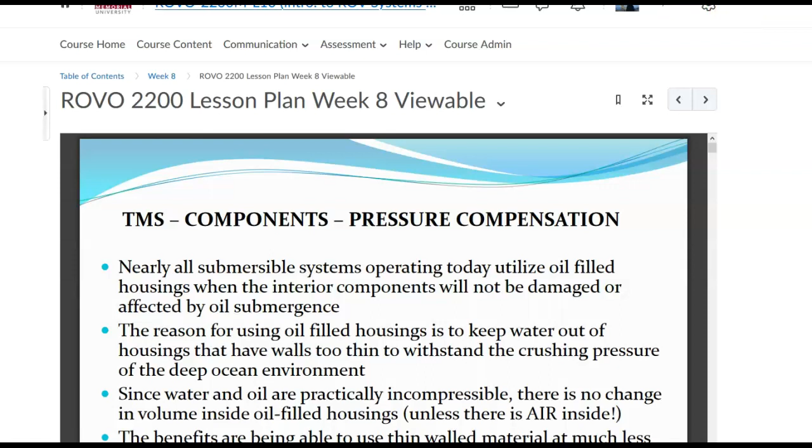Alright, here we're starting week 8, and this is about the hydraulics. Pressure compensation components of the TMS. So we're still into the TMS, the tether management system. That's the submarine base for the ROV.

Just a recap. Okay, I got a squeaky chair, which we don't like. Okay, so...

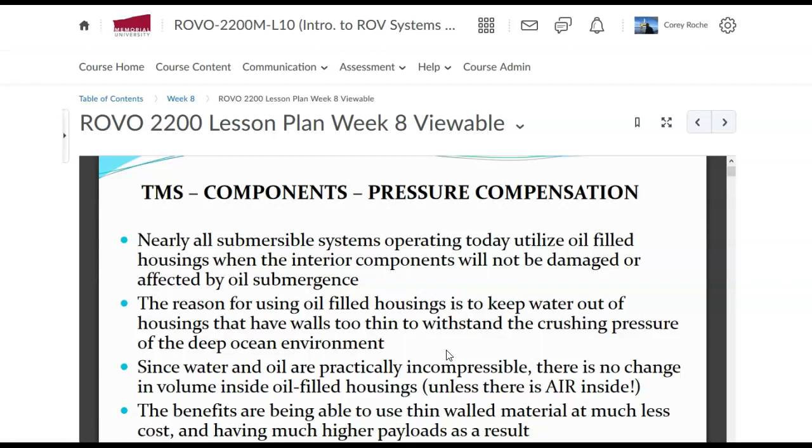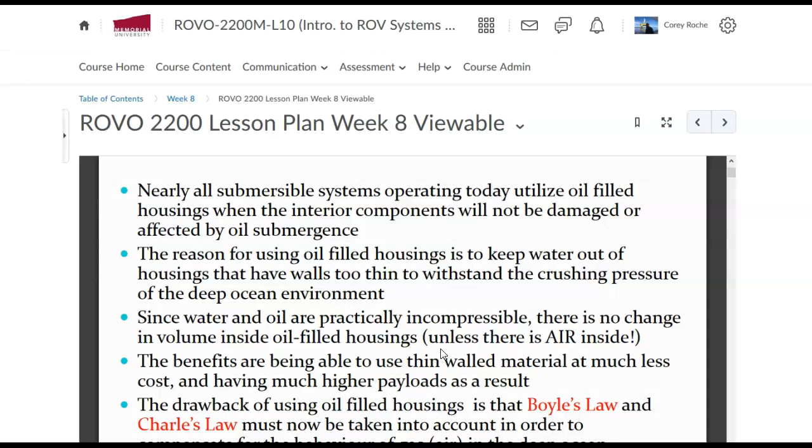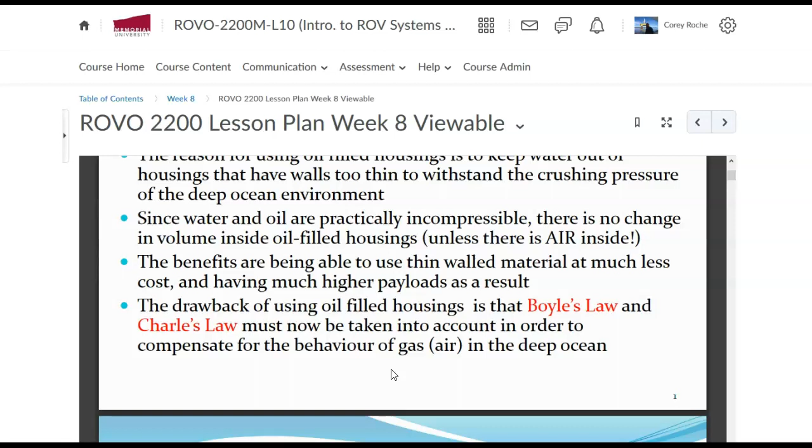Since water and oil are practically incompressible, there is no change in volume inside oil-filled housings unless there's air inside. Hence the air and water checks, okay? The importance of them. The benefits are being able to use thin wall materials at much less cost and having much higher payloads as a result. So that's self-explanatory. The lighter the ROV is, with these thin walled housings, the more payload it can carry, okay? The drawback of using oil-filled housings is that Boyle's law and Charles' law must now be taken into account in order to compensate for the behavior of gas, which is air, in the deep ocean.

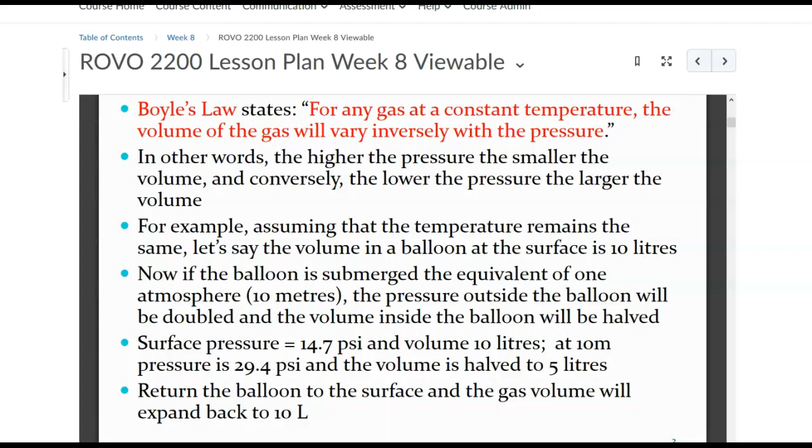Boyle's law states for any gas at a constant temperature, the volume of the gas will vary inversely with the pressure. In other words, the higher the pressure, the smaller the volume, and conversely, the lower the pressure, the larger the volume.

For example, assume that the temperature remains the same. Let's say the volume in the balloon at the surface is 10 liters. Now, if the balloon is submerged the equivalent of 1 atmosphere, 33 feet, 10 meters, the pressure outside the balloon will be doubled and the volume inside the balloon will be halved. Surface pressure equals 14.7 psi and volume 10 liters. At 10 meters, pressure is 29.4 psi and the volume is halved to 5 liters.

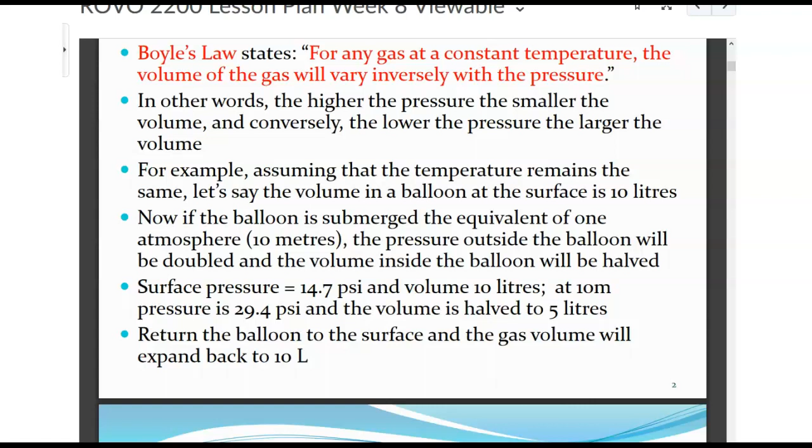Alright, so do you get that? 14.7 psi and volume is 10. 10 meters down, it doubles and the volume is halved to 5 liters. Return the balloon to the surface and the gas volume will expand back to 10 liters.

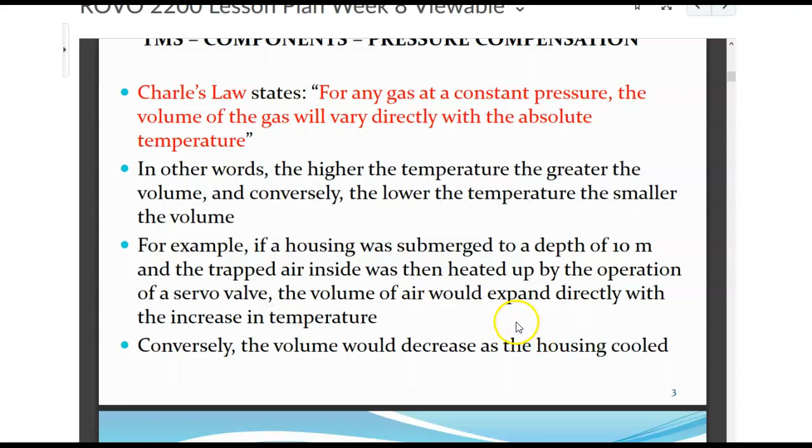Charles' law states for any gas at a constant pressure, the volume of the gas will vary directly with absolute temperature. In other words, the higher the temperature, the greater the volume, and conversely, the lower the temperature, the smaller the volume. For example, if a housing was submerged to a depth of 10 meters and the trapped air inside was then heated up by the operation of a servo valve, the volume of air would expand directly with the increase in temperature. Conversely, the volume would decrease as the housing cooled.

So now we have the TMS and ROV, oil-filled housing and hoses being submerged in the deep ocean. Two methods are used to compensate for the external pressure acting on these housings and hoses. Oil-filled pressure balanced: this method is used for subsea cabling when the cables are filled with oil but not pressurized, meaning the oil inside is pressure balanced with the ambient pressure outside.

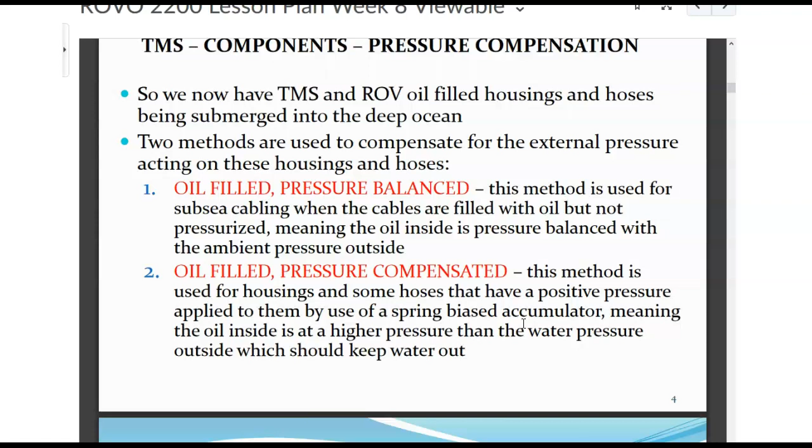Oil-filled pressure balanced, pressure compensated again. This method is used for housing and some hoses that have a positive pressure applied to them by use of a spring-biased accumulator, meaning the oil inside is at a higher pressure than the water pressure outside, which should keep water out. So know those two and know the difference.

So here we've got a compensator. Some people would know it as an accumulator probably, those with a hydraulic background. And that being said, if you have a hydraulic background, you are light years ahead of people, alright? So hydraulics is good to know.

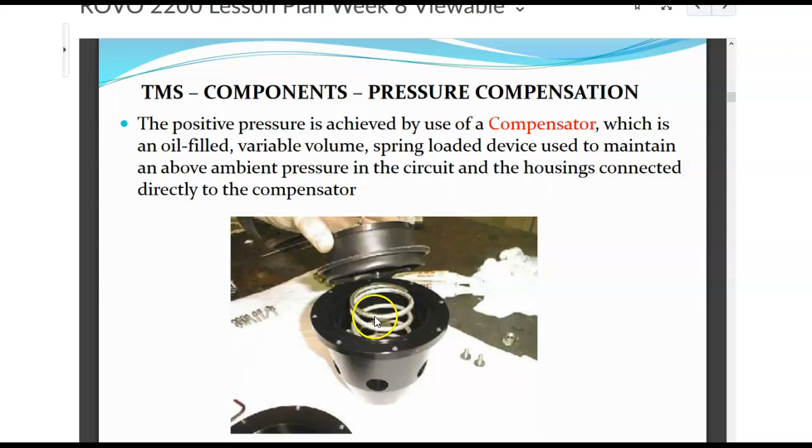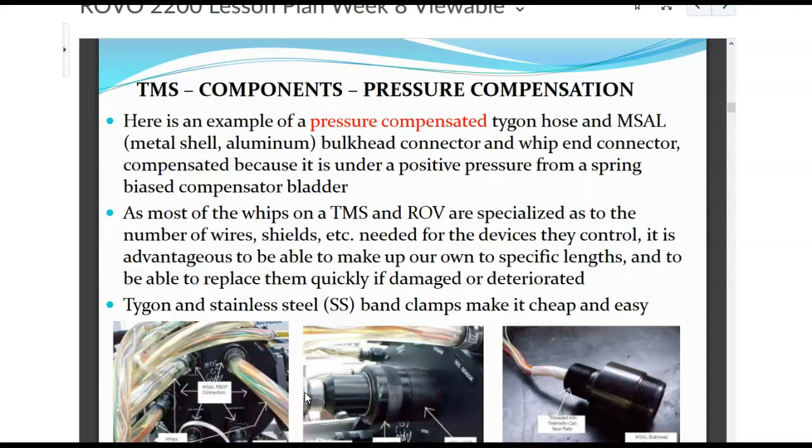The positive pressure is achieved by use of a compensator, which is an oil-filled variable volume spring-loaded device used to maintain an above ambient pressure in the circuit and the housings connected directly to the compensator. Here's an example of pressure compensated Tygon hose and MSAL, metal shell aluminum, bulkhead connector, and whip end connector, compensated because it is under positive pressure from a spring biased compensator bladder.

As most of the whips on a TMS and ROV are specialized for the number of wires, shields, etc. needed for the devices they control, it is advantageous to be able to make up our own to specific lengths and to replace them quickly if damaged or deteriorated.

I already talked about the importance of, and how cheap yet effective these Tygon hoses are, putting in your own wires, to get them through like 6 to 10 foot lengths. Say you got like 6 to 8 wires, or even 10. The best way to do it...

...is to fish them through, to sort of twist them, braid it. So to braid it, you would put one end in a drill and the other end in a vise. And you would do what I call the Jesse James method.

Jesse James is this guy that was into motorcycles, making his own motorcycles years ago. Not the outlaw Jesse James, okay, from the 1800s.

You do a controlled speed and twist your cabling. Now, knowing that if you take off the drill and or let go of the vise, it's all going to come unraveled, right? So you'd have to sort of tie wrap it into place. But now you got a nice braid made.

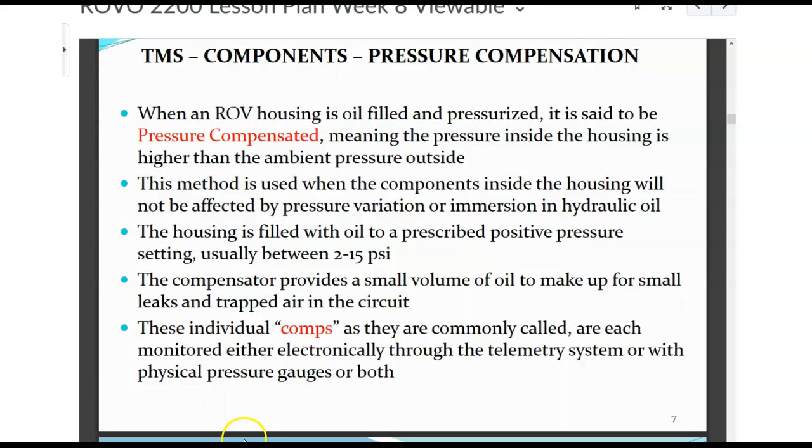The compensator provides a small volume of oil to make up for small leaks and trapped air in the circuit. These individual comps, as they are commonly called, are each monitored either electronically through the telemetry system or with physical pressure gauges, or both.

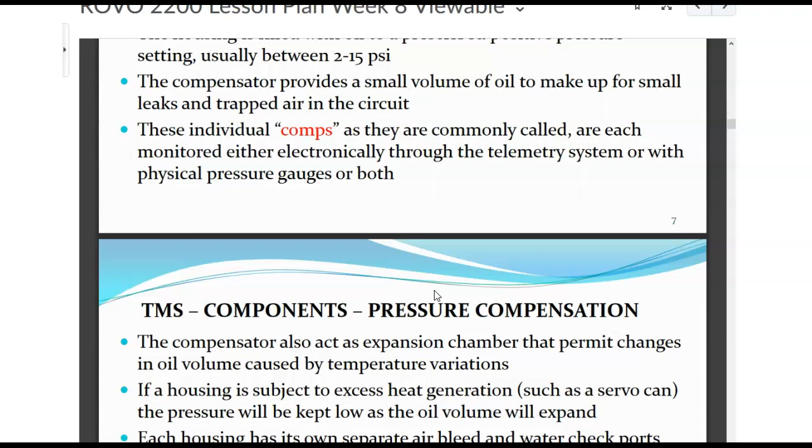The compensator also acts as an expansion chamber that permits changes in oil volume caused by temperature variations. If a housing is subject to excess heat generation, such as a servo can, the pressure will be kept low as the oil volume expands.

Each housing has its own separate air bleed and water check ports. The air bleed ports are located at the top, as air bubbles will migrate to the highest part of the housing, and the water check ports are located at the bottom, as water is heavier than oil and will sink to the bottom.

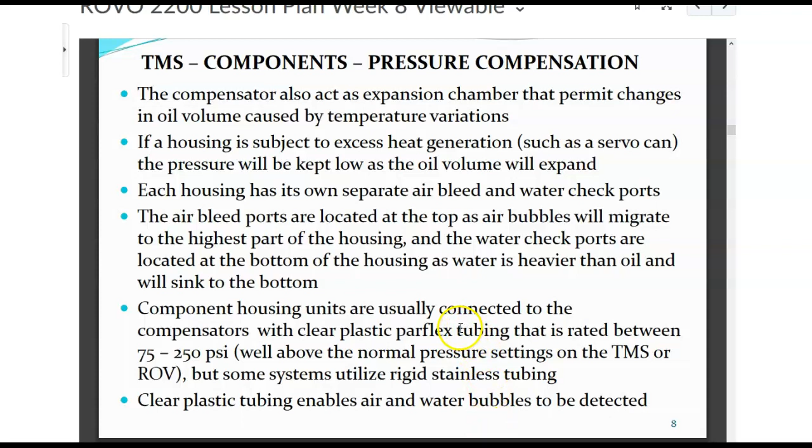Component housing units are usually connected to the compensator with clear plastic Parflex tubing rated between 75 to 250 psi, well above the normal pressure settings on a TMS or ROV, but some systems utilize rigid stainless steel tubing. Clear plastic tubing enables air and water bubbles to be detected, so you can see it. Very effective designs.

So here you got 3 Firestone bladders, okay, the respective combination of Parflex and stainless steel tubing.

Alright, so you can see all the tubing, right? You got your pump, your motor, Tygon, filled with oil. Air checks up on top, and down below there's a ball valve for isolation, another ball valve for isolating. But somewhere there should be a water check there. Not very clear on this picture.

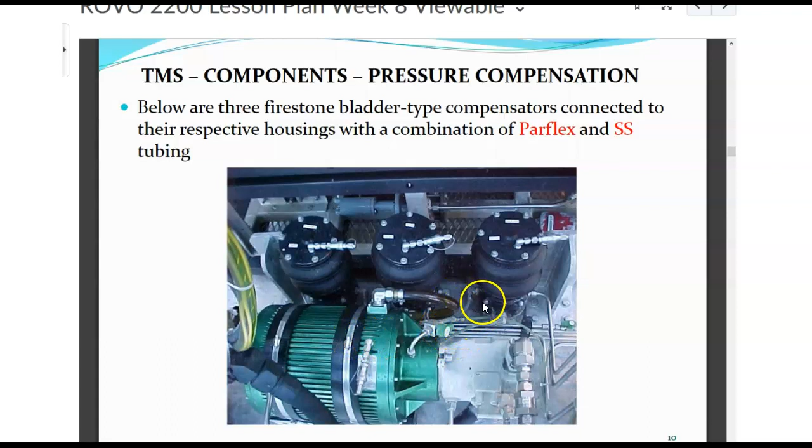Once again, another isolation check valve. So if you want to drain this can, you would turn this off so you wouldn't drain more than needed. You'd have to do maintenance inside of here.

It's very important to ensure during pre-dive checks that all quarter-turn valves are in the open position, enabling pressure compensation between them. Alright, so this will be with some old supervisors.

There's two trains of thought about this. With this ball valve, some supervisors training new guys may have them in the turned off position. So once they tell you to go down, do a kick-the-tire check on the equipment before pre-dives, make sure you always remember this, that they should be in that open position, okay?

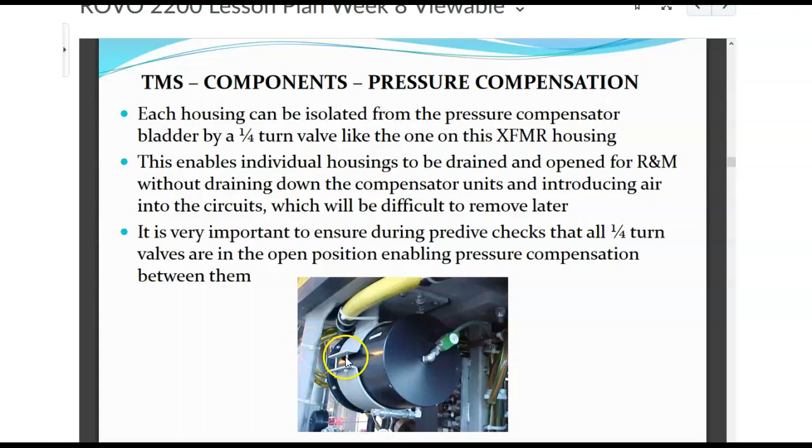Now, that is an effective way of teaching. Is it a good way of teaching? I don't know, yes and no. I know I passed it because I'm aircraft maintenance, but I didn't really agree with that method of trying to be tricked. Alright, but hey, it shows you're doing your job, right? When you do catch stuff like that. So there you go.

Normally, water checks are done by drawing a volume from the compensator and from the housing to get a sample of the oil inside. This will flush any accumulated water out through the bottom of the housing and the compensator until only clear oil is flowing.

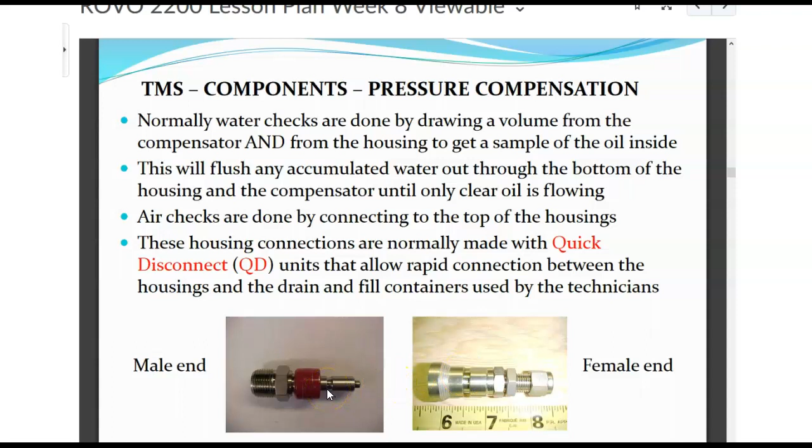Air checks are done by connecting to the top of the housings. These housing connections are normally made with quick disconnects, QDs. Alright, so remember that term - units that allow rapid connection between the housing and the drain and fill containers used by the technicians. Alright, so this is the male end and female end, and that's what they're called from the hydraulic industry. This has got to make a little clicking noise as it inserts into this. If it doesn't make the clicking noise, then it's not going to work. Okay, so remember that for the rest of your life.

Most pressures have remote access panels for easier checking and filling of the compensators. Normally all pressure adjustments are made through the compensators, not at the housings they're designed to protect. This ensures that any water in the circuit will remain at the lowest point, which is normally the compensator unit. Alright, so they should have these little banks made, shaft seals, valve packs, right? Port motor, starboard motor, it should be left to right. Okay, and that being said, fill up your housings through the compensators like what it says. And these rulers are just here to give you an idea of how big everything is, okay?

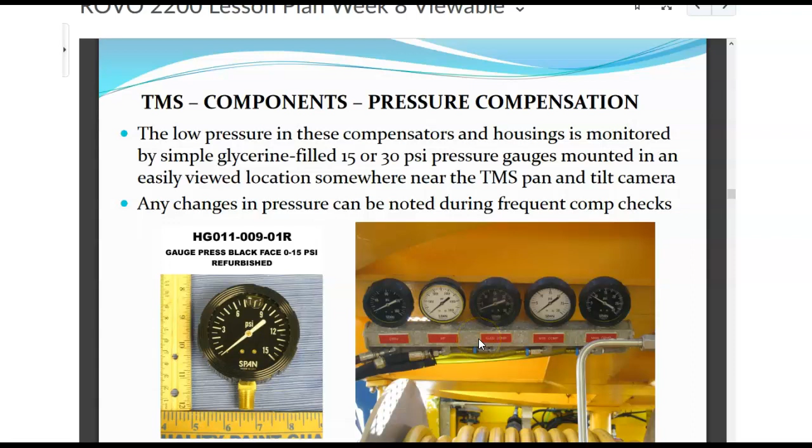So the low pressure in these compensators and housing is monitored by a simple glycerin-filled 15 or 30 psi pressure gauge mounted in an easily viewed location somewhere near the TMS pan and tilt camera. So there's a pan and tilt camera that can tilt down to the bottom of this tether drum, left, right, and up. And you would have to monitor your gauges during the dive. Any changes in pressure can be noted during frequent comp checks. And everything's here labeled, okay, which it should be.

Some of these pressure compensated housings have the potential to become overpressurized due to a failure of an internal hydraulic fixture or seal, normally a high pressure system valve or solenoid. If high pressure hydraulic oil from the main hydraulic system leaks into a sealed circuit pressure compensated housing, it can quickly rupture the housing or tubing and create a crisis situation. 20 psi check valves are used in these housings to reduce the risk of overpressurizing the circuits.

So I've come across this, right? We're thinking we'll get into it later. A solenoid inside of a pressurized housing has an O-ring missing. So the system pressure when we start up this ROV XL38 is leaking into the static side, and there's a blow-off valve there that's coming out through a blow-off valve. So that requires draining, right? Isolate, drain, make sure the power is off to begin with, lockout, tag out.

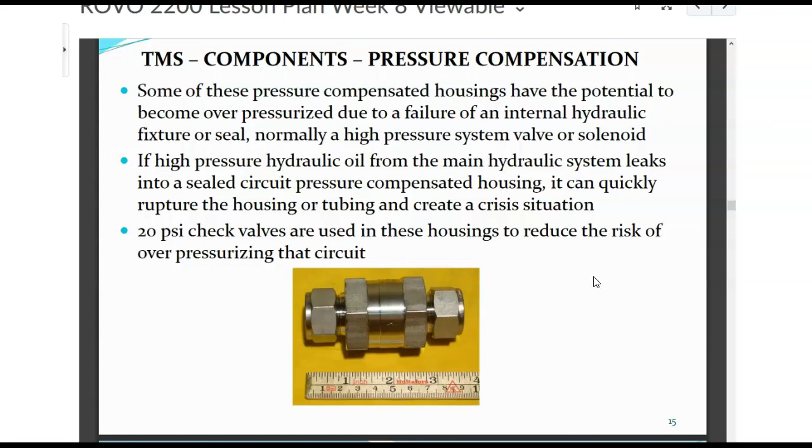Check the solenoids underneath - that's 4 screws, take them off, but it's not as easy as I'm saying. It's in a hard to reach spot, but it's got to be done, and it will be done. So this is what I'm talking about - these are rate control valves, right? Solenoids possibly causing pressurized hydraulic oil in the housing, causing overpressurization of the comp circuit. So this is exactly what I'm talking about. On the back side of these, right? So 1, 2, 3, 4 - you'd have to drain this can down, make sure all the power was off beforehand, right? 1, 2, 3, 4 screws, haul it out and check to see if the O-ring is on the back side.

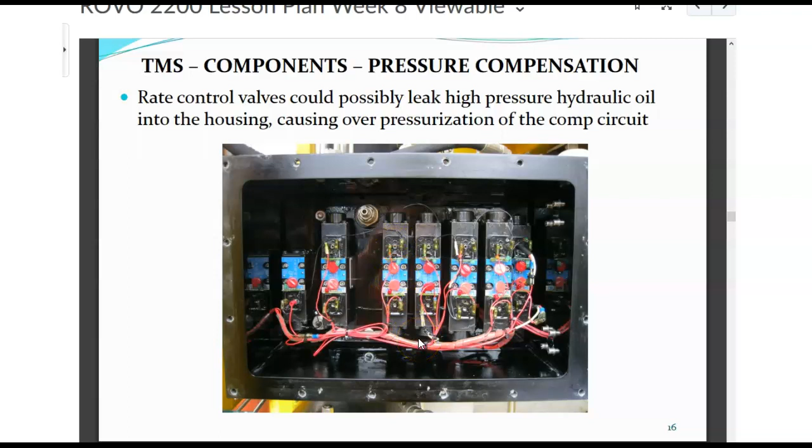Check valve permits a one-way flow of oil away from the housing, but only when the pressure exceeds the setting of the check valve, which is normally about 20 psi. If a leak should develop and pressure builds up, the check valve is designed to release this pressure either back to the main hydraulic system reservoir or vent it directly into the sea.

It should be noted, however, that these valves can handle only about 1.5 gallons per minute of flow, and any higher flow rates can quickly overpressurize the housing, possibly causing a failure. These failures are rare, however, and can usually be anticipated by noticing a trend developing in the affected housing through careful monitoring of the compensator gauges before, during, and after dives. If the pressure gauge changes unexpectedly or trends one way or another, it's time to troubleshoot.

Clean systems such as valve packs are normally routed to the main reservoir. Contaminated housings, like thruster shaft seal comps, which are frequently contaminated with seawater due to the intake of water through the thruster seals, are simply vented into the sea.

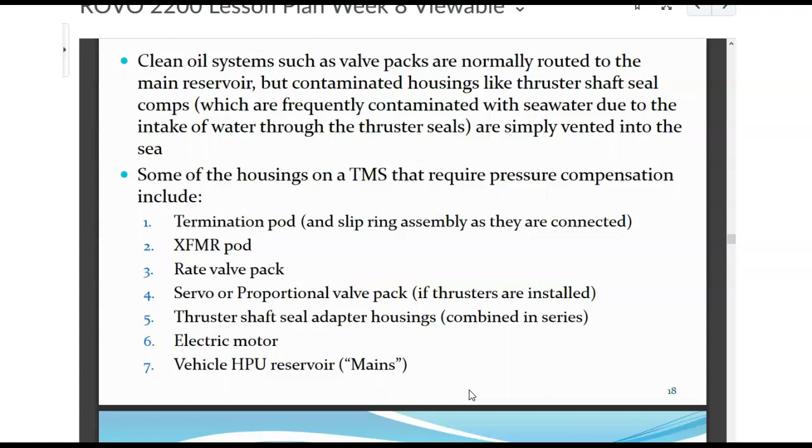Some of the housings on the TMS that require pressure compensation include the termination pod, a slip ring assembly as they are connected, transformer pod, rate valve pack, servo proportional valve packs where thrusters are installed, thruster shaft seal adapter housing combined in series, electric motors, vehicle HPU reservoir mains, hydraulic power unit.

The hydraulic oil used in the pressure compensation system is the same oil as that used in the TMS and ROV electro-hydraulic system. The main reason is that the hydraulic oil from the static comp may mix with the main hydraulic oil should an overpressure situation occur. If dissimilar oils were used, that scenario would necessitate complete draining and flushing of the main hydraulic system. A more practical reason to use the same oil for both system hydraulics and compensator hydraulics is that you only have to stock one type of oil in bulk, and since the main hydraulic system oil is already approved for subsea use and is suitable for static comp use, why not use it?

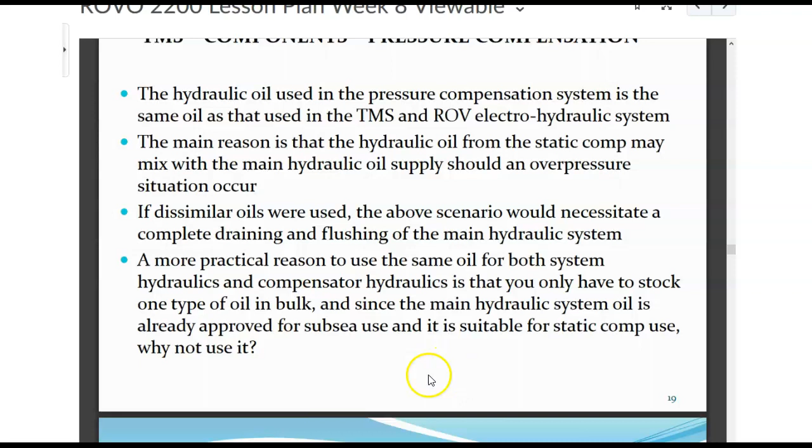Electric motors now used on the TMS and ROV are especially designed to run at higher voltages in a subsea environment, so you don't run these on deck for too long. They're water cooled, similar to standard industrial three-phase electric squirrel cage motors, but have thinner housings to reduce weight and are not designed to operate out of the subsea environment due to their susceptibility to heat damage. They are designed to be immersed in water for cooling and are not designed to be run on the surface.

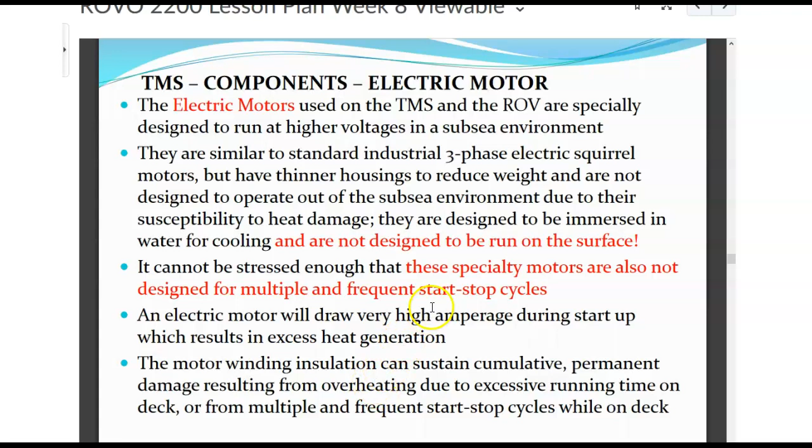It cannot be stressed enough that these specialty motors are also not designed for multiple and frequent start-stop cycles, so don't go turn them on and off like that. The electric motor will draw a very high amperage during startup, which results in excess heat generation. The motor winding insulation can sustain cumulative permanent damage resulting from overheating due to excessive running time on deck or from multiple and frequent start-stop cycles while on deck.

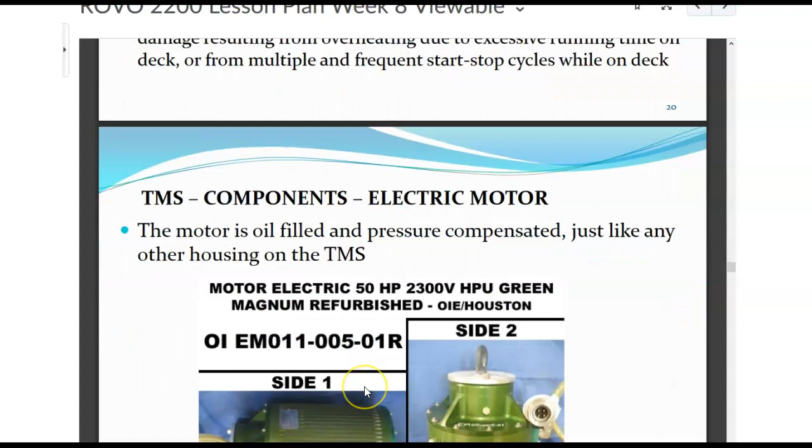So here is a green colored, anodized housing. Now with this, they're fairly heavy.

So usually get the crane crew or something. If you've got to change one out, get the crane to lift it. If not, strong people can put a pry bar or something in between that lift eye and carry it themselves, taking frequent breaks. I've had to lift it up several decks one time with another guy. Not the easiest task.

The motor usually has its own dedicated compensator unit to prevent the accidental ingress of water from another housing. Here you can see the electric motor connected to the hydraulic pump alongside several Firestone comp units. Alright, so this is the same old picture.

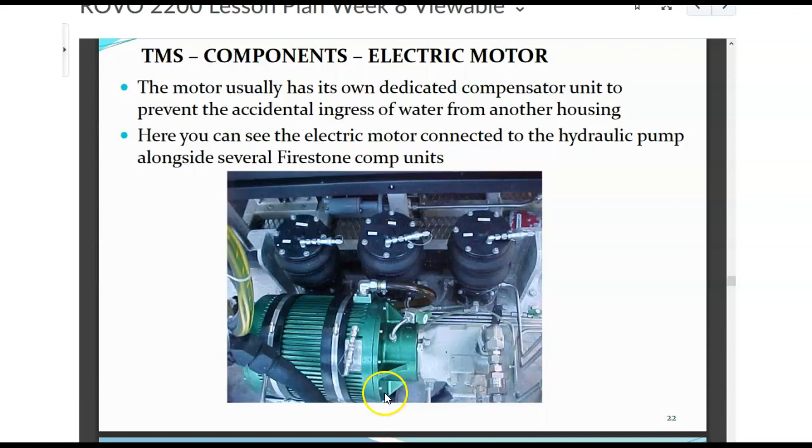Electric motor flow again: the TMS units typically have only one electric motor, with a wide range of power ratings depending on the system design and hydraulic load. However, the power requirement is usually the same as the ROV in order to have similar components and spare parts, etc. The motor is one of the simplest components on the TMS and is remotely started and stopped from the PDU, running quite independently of the rest of the TMS electrical components.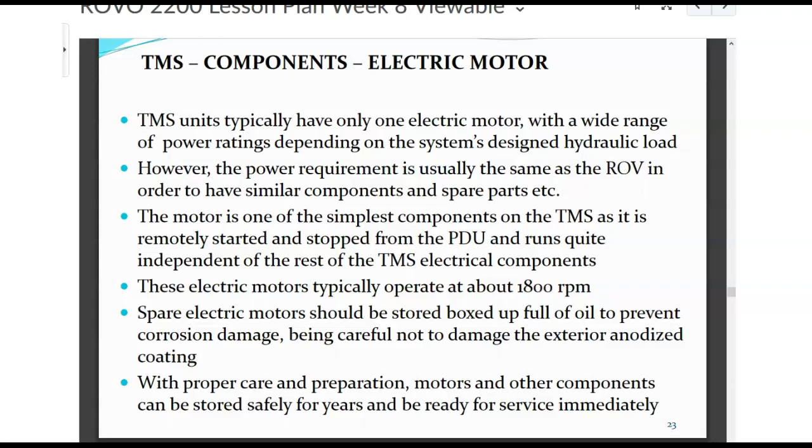These electric motors typically operate at about 1800 RPM, revolutions per minute. Spare electric motors should be stored boxed up full of oil to prevent corrosion damage, being careful not to damage the exterior anodized coating. With proper care and preparation, motors and other components can be stored safely for years and be ready for service immediately.

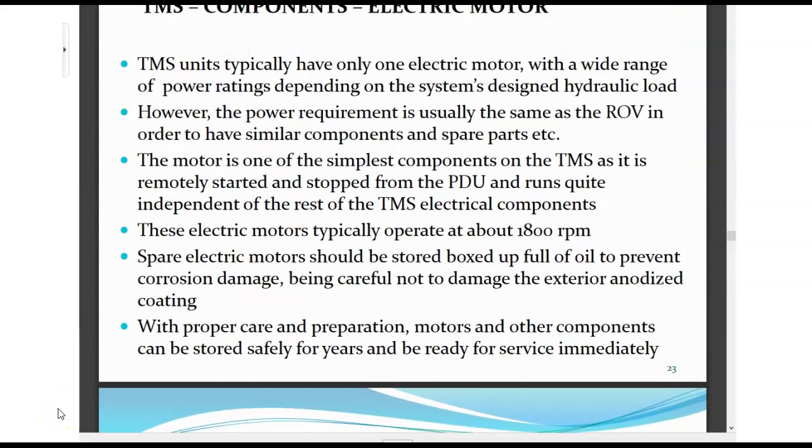The hydraulic pump is typically a variable displacement, pressure compensated axial piston design. Axial piston pumps convert rotary motion provided by the electric motor to an axial reciprocating motion. As the pistons move into the cylinders, they draw oil in and expel it under pressure. They are called variable displacement pumps because they will supply oil at whatever rate is demanded by the system, up to the pump's output capacity. For example, if the pump is running and there is no demand for oil, it will de-stroke itself and only supply enough oil to make up for internal leakage, up to the maximum pressure setting. This reduces heat generation and extends the life of the pump.

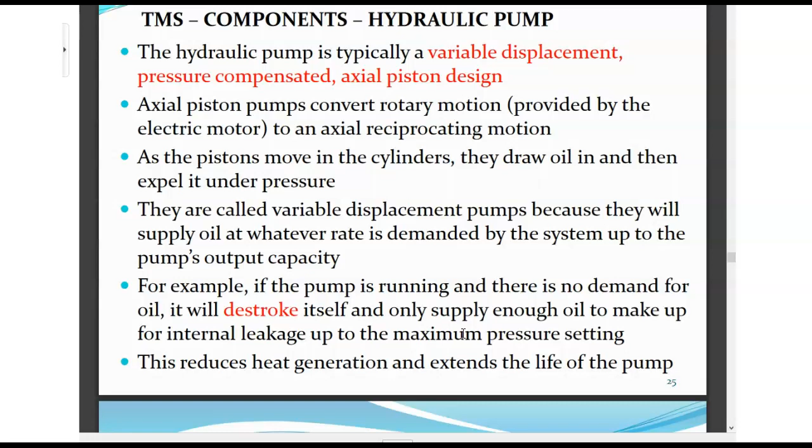Right, so de-stroke. So HAWE hydraulic, you can put that in, right? So there's a little definition and you can go on, right? Flow rate, on-stroke time gets into it.

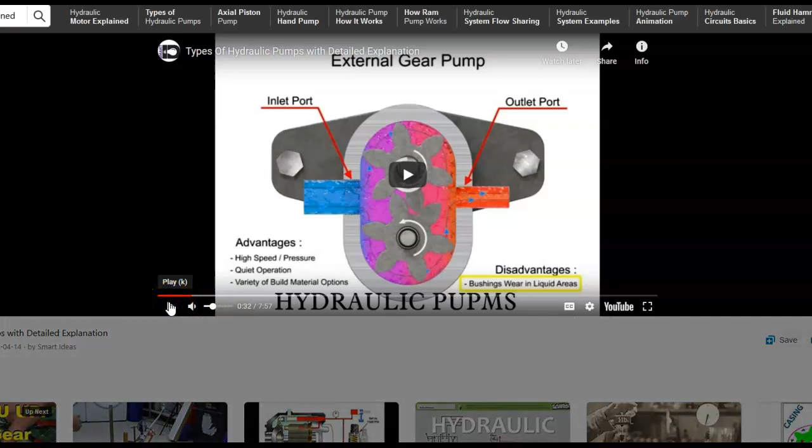Different types of pumps here. That being said, now here's another one. Types of hydraulic pumps with detailed explanation. We'll just let it run for a second. An external gear pump uses two gears rotating against each other to provide fluid movement. One gear is driven by a motor connected to a shaft. This is called the drive gear because it is driven by a motor, and it in turn meshes with and drives the movement of the second gear. As the gears rotate away from each other...

Hydraulic pumps explained. Axial. Hi guys, welcome back to howmachineworks.com. How an axial flow variable displacement pump works today. Let's learn how an axial flow variable displacement piston pump works. With the help of this animation, you can go on and watch the entire animation and learn it. First, let's identify the components. Here, this is the casing.

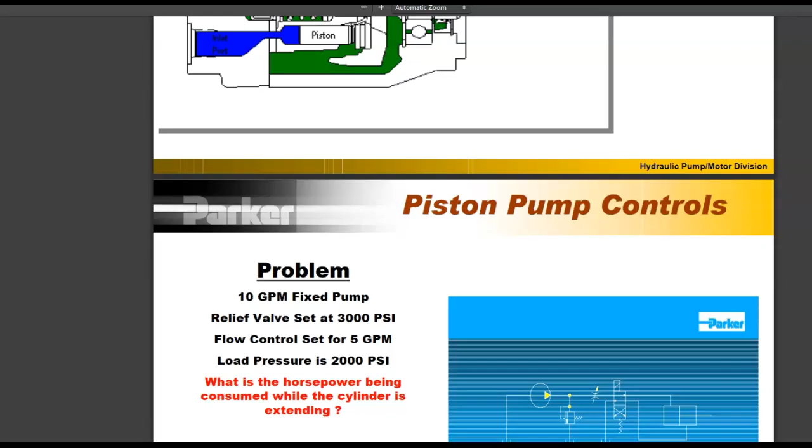There's another one. Alright, hydraulics and pneumatics. And this is pretty good too.

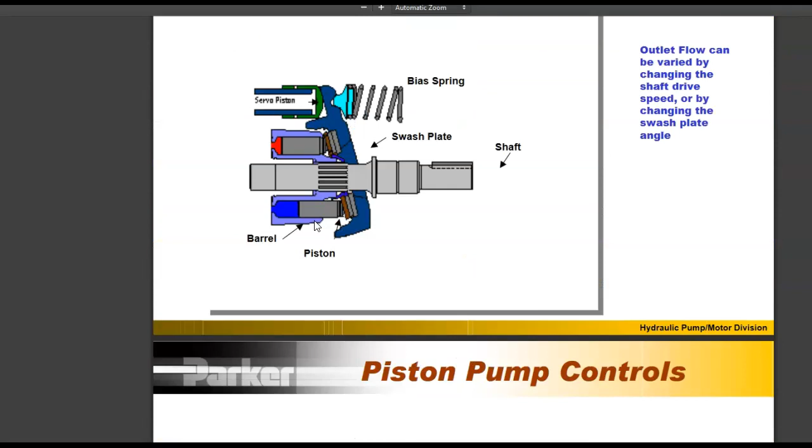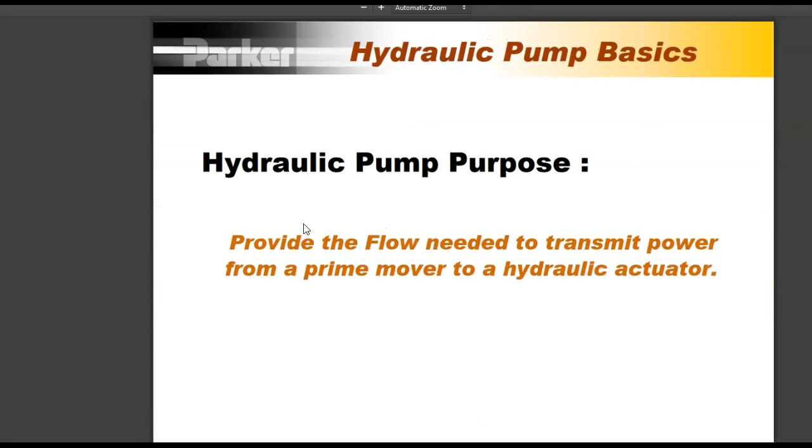So like as you're reading or listening, always email me if you're unclear, but take it upon yourself to go the extra step, extra mile, and search for the truth yourself, okay? And you can go on and on. Like I say, the ROV course, especially if you get some experience at it, you can get jobs at various other sub-trades, we'll call it. Like in a hydraulic shop, right? In an electronics store, with a windmill farm. As a repair and maintenance technician with Baker Hughes or MI Swaco or Schlumberger, Halliburton, Franks—I'm just thinking oil companies. There's also defense companies, right? As long as you get electromechanical experience, and this course trains you on both, that's all I can say.

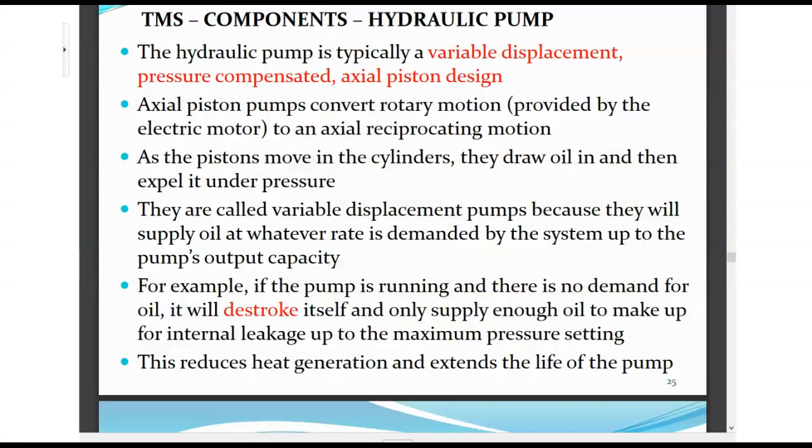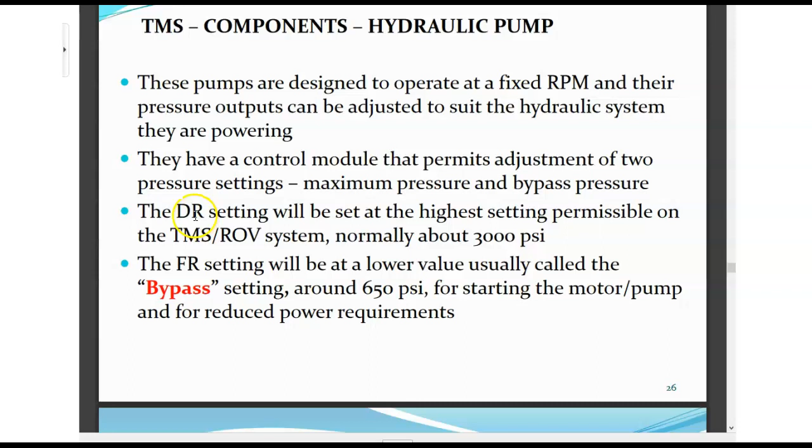We'll go back to this. These pumps are designed to operate at a fixed RPM, and the pressure outputs can be adjusted to suit the hydraulic system they are powering. They have a control module that permits adjustment of two pressure settings: maximum pressure and bypass pressure. The DR setting will be set at the highest setting permissible on the TMS ROV system, normally about 3000 psi. The FR setting will be a lower value, usually called the bypass setting, around 650 psi, for starting the motor pump and for reduced power requirements. So remember what we said about the amperage and all that earlier—it's all tied in, even though we're talking about hydraulics and PSI now. So FR is for the starting, DR is the pressure setting, and FR is the flow.

So here you go. This has two spools that can be adjusted with Allen keys. There's a little printed procedure for this. Right here, DR sets the maximum pressure and FR sets the bypass pressure. Okay, so right here you get your wrench, you take off these caps, then this is exposed. You've got to loosen this lock nut, and then with the Allen key, clockwise—as far as I can remember, and what I've done in the several times I've done this procedure—would reduce the orifice, thus increasing the pressure.

Counterclockwise, you open up the pipe, the river, whatever, and the pressure decreases. Once you set it to whatever setting you want, or your supervisor tells you, or the manual says, hold it tight with your Allen key and use your wrench to lock it into place with your lock nut. You cannot move this spool with the Allen key when this lock nut is tight. This has got to be loosened off first. So when you go to loosen this, put your Allen key in to hold it steady so you know what setting you had it on, okay? Makes sense.

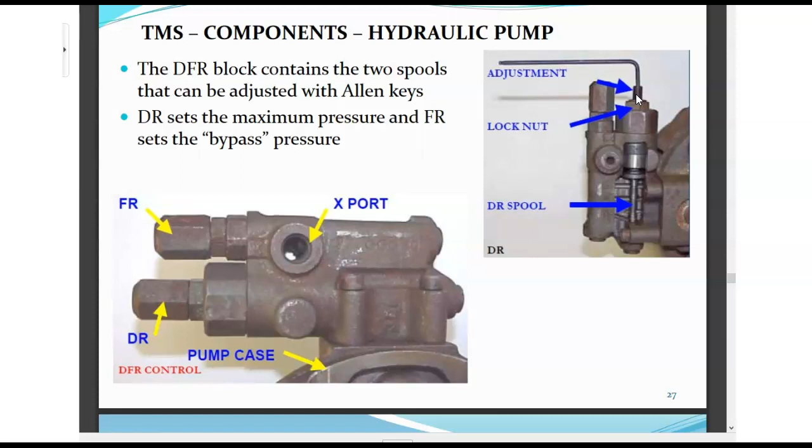A 28cc pump moves 28 cubic centimeters, which is a milliliter, per revolution at 1800 RPM. That's 50,400 cc's, or 13.3 gallons per minute. Therefore, a 28cc pump can produce a maximum flow rate of 13.3 gallons per minute to supply actuators, thrusters, and motors. Know this: a hydraulic pump does not pump pressure, it creates flow. Pressure is the result of resistance to flow. High pressure, low flow rates; low pressure, high flow rates. High pressure equals low flow rates.

Makes sense. Going back to what I said here, you decrease the orifice, decreasing your flow rate in the river, the pipe - just think on water and all that - you get high pressure.

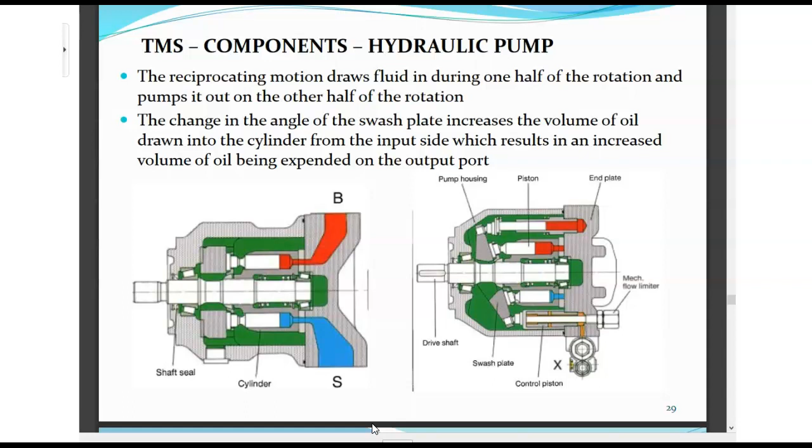Like with most of these parts, you will have time to fix it, but a lot of times, time's money offshore. So you're going to isolate, take this pump off, put on a new pump or the spare pump, and start it up to see if it works, okay? Then on your downtime, you will take this apart and self-teach yourself to repair it, okay? Sometimes you won't be able to repair it - a lot of times you will not be able to repair it.

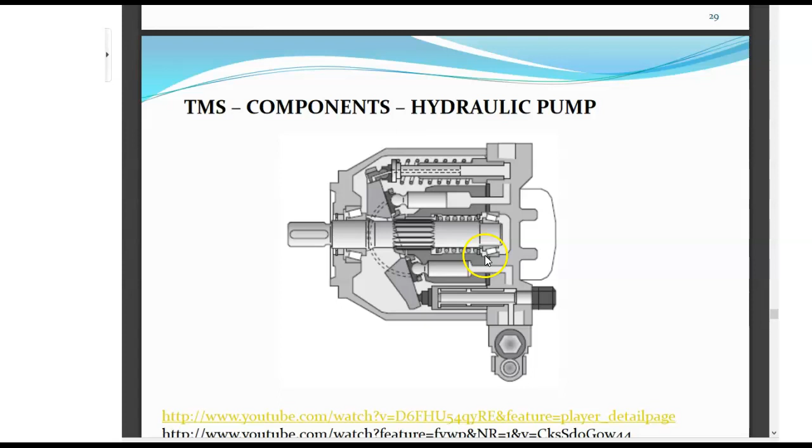Any component that has a tamper-proof seal - how can I explain this - a tamper-proof seal would be a sticker from the manufacturer. This part could come off, even though I know it can't, but you had a sticker right here on this little step. If you sent this back to the manufacturer and they see that this seal was broken, they would void your warranty, and you will be held responsible because you got into something you weren't supposed to. Heed my advice on tamper-proof seals. We'll talk about that later with cameras and all that - I'll give you a story, but right now we're dealing with hydraulics.

Most hydraulic pumps used subsea on the TMS and ROV only have 2 pressure settings: maximum and destroke, commonly referred to as bypass. Full system pressure is the maximum pressure that a specific hydraulic system is designed to operate within, about 3000 psi. Bypass is a reduced setting selected when starting the electric motors in order to reduce the load on the motor and pump, therefore reducing startup amperage and resulting heat generated in the process - 650 psi - and to prevent a locked rotor condition on startup.

So the main things to know about ROV system hydraulic pumps are they have a fixed operating pressure and can supply a variable volume of oil to the system based upon system demand. Remember that.

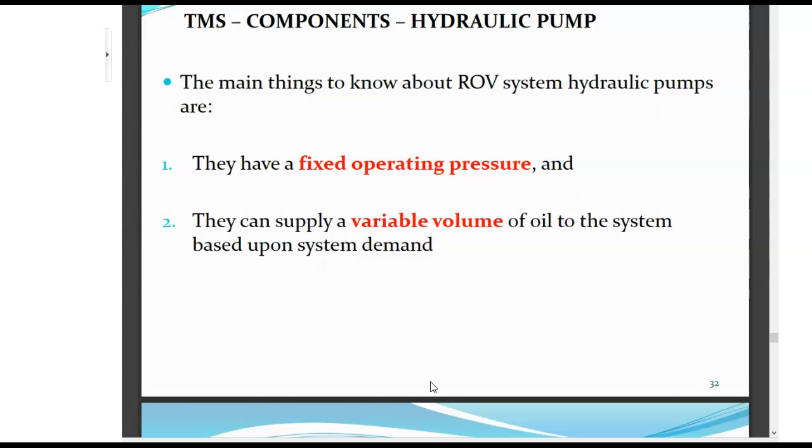Now here we are, the mains, okay? The main compensator, joint, Firestone bladder. Now this is just on the Magnums and Millenniums - not all ROV systems have this style.

So the main reservoir, usually called the mains, is exactly the same kind of pressure compensator used to pressure balance static housings, only larger, and includes temperature and volume sensors. The mains reservoir volume of hydraulic oil is dictated by the flow requirements of the pumps and the components they supply.

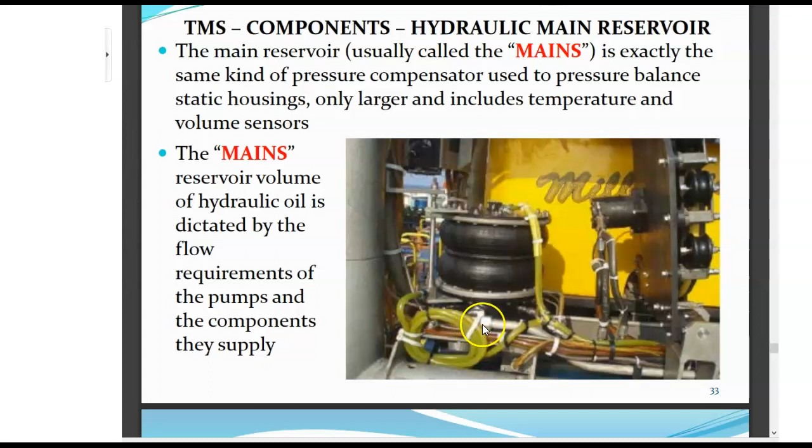Now I don't like this configuration here they got. Alright, this is outside, more or less. I just don't like the way that's wound up, even though it's inside this cage frame. Obviously they got too long, right? This is what I'm talking about. They use 10 feet for what looks like a 6-foot runner. No need, okay? That's just a problem, really, it is a problem. Especially with these white tie wraps, they're the worst of all the tie wraps. They become pretty brittle over time and crack. So just be aware of little things like that.

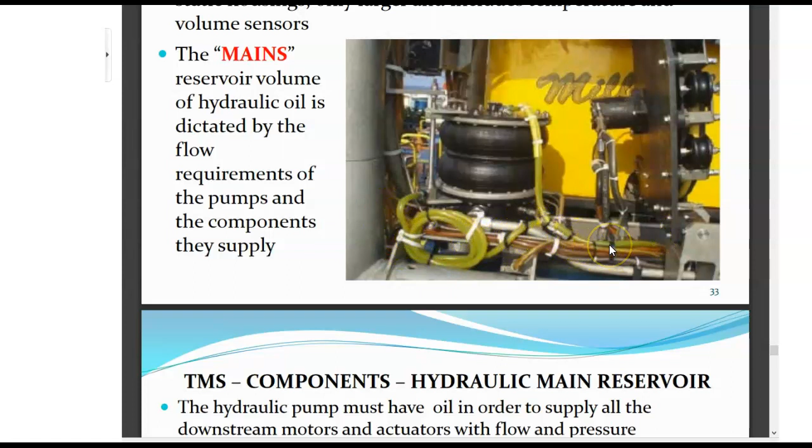Cut things to the length, at least enough for 3 services. So if we say you got 6 inches, a foot and a half. So if this was a 6-foot run, 7.5 feet would be long enough. And I don't mean 6 feet in a straight line, you use a string or a rope and fake run it. Take the rope in the shop, measure what you got, and add another 1.5 feet, okay? Then you're safe.

The hydraulic pump must have oil in order to supply all the downstream motors and actuators with flow and pressure. The mains comp usually only holds about 20 to 30 liters of hydraulic oil. The mains is spring loaded to maintain a maximum head pressure of no more than 7 psi on the fluid in order to prevent cavitation within the pump resulting from a vacuum condition and to keep the system pressure compensated. Comp pressures greater than 7 psi can also cause damage to the pump by the mechanical action of the piston shoes lifting off the swash plate and violently crashing down.

This is another reason never to run the electric motors on deck, because there is not a large reservoir of oil to provide cooling, and the pumps will rapidly overheat, which can lead to seal failure and premature pump failure. Alright, so this is an important page, okay?

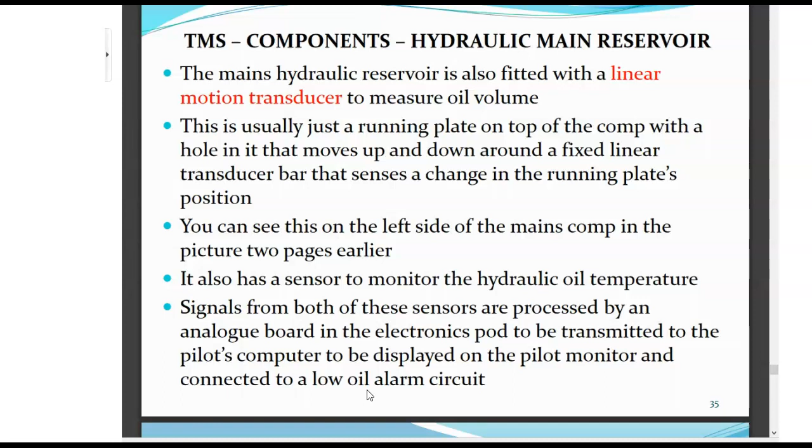The mains hydraulic reservoir is also fitted with a linear motion transducer to measure oil volume. This is usually just a running plate on top of the comp with a hole in it that moves up and down around a fixed linear transducer bar that senses a change in the running plate's position. You can see this on the left side of the mains comp in the pictures 2 pages earlier. There's also a sensor to monitor the hydraulic oil temperature. Signals from both of these sensors are processed by an analog board in the electronics pod to be transmitted to the pilot's computer, to be displayed on the pilot monitor, and connected to a low oil alarm circuit.

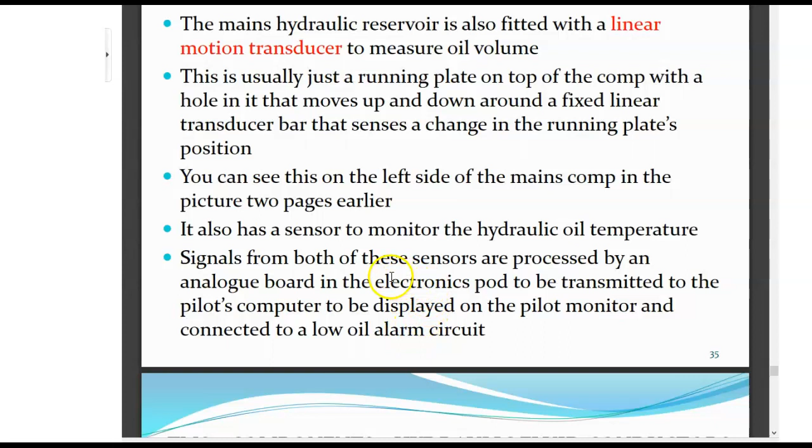Right, so remember we talked about the analog cards, right? This varies, so it's analog. Linear motion transducer, left side of the comp, right? So that's it here. Alright, and as it moves, as it expands or contracts, right, this slides up and down this bar, okay?

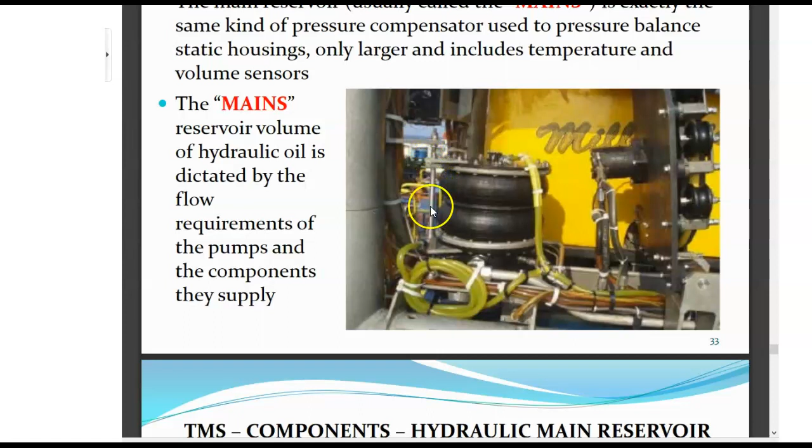And like I say, feel free to get into the linear transducers, motion transducers, all you want. You're going to be taught it anyway, I think, with another instructor.

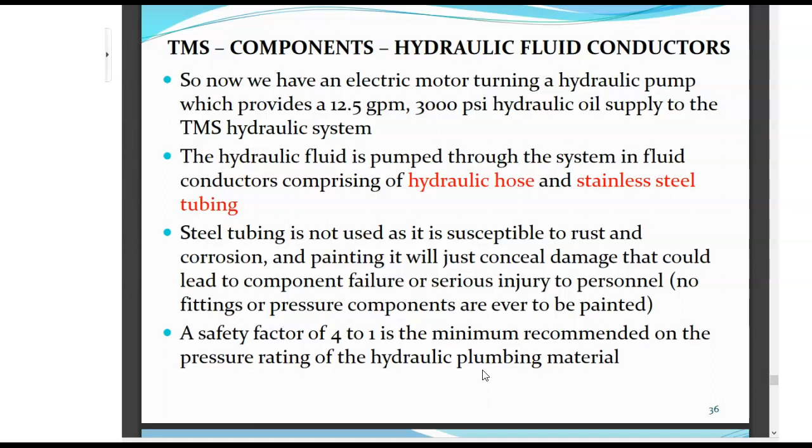So now we have an electric motor turning a hydraulic pump which provides 12.5 gallons per minute, 3000 psi hydraulic oil supply to the TMS hydraulic system. Hydraulic fluid is pumped through the system in fluid conductors of hydraulic hoses and stainless steel tubing. Steel tubing is not used as it's susceptible to rust and corrosion, and painting will just conceal damage that could lead to component failure or serious injury. No fittings or pressure components are ever to be painted.

Alright, so that's like a cardinal rule. Stainless steel, a cardinal rule. Right, do not use plain steel.

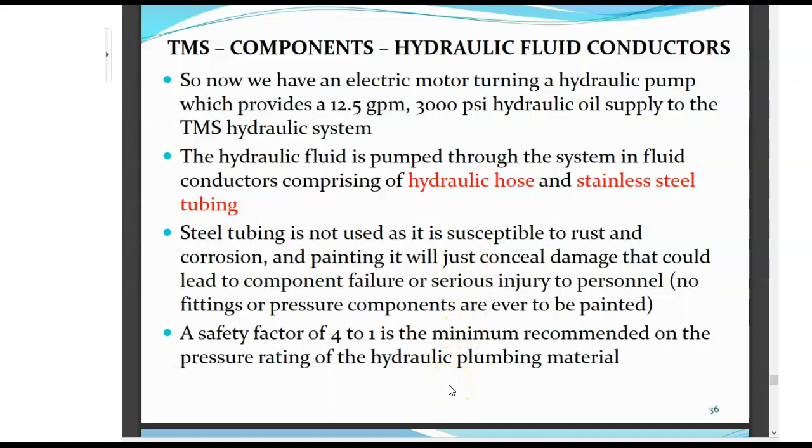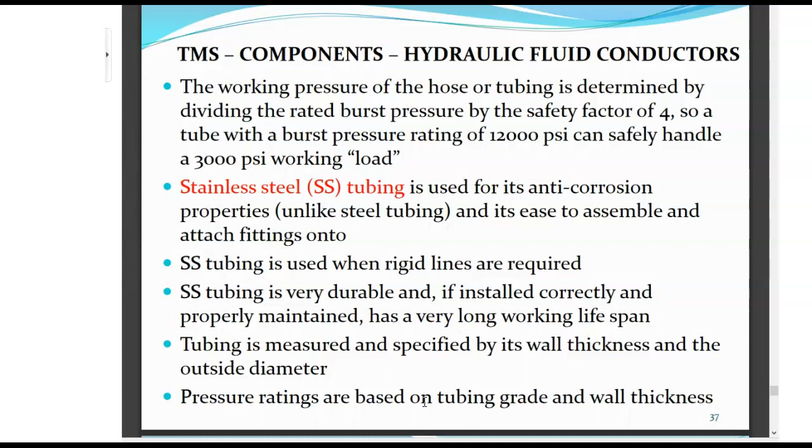Safety factor 4 to 1 is the minimum recommended on the pressure rating of the hydraulic plumbing material. So the working pressure of the hose or tubing is determined by dividing the rated burst pressure by the safety factor of 4. So a tube with a burst pressure of 12,000 psi can safely handle a 3,000 psi working load. Stainless steel tubing, SS, is used for its anti-corrosion properties, unlike steel tubing, and is easy to assemble and attach fittings onto. Stainless steel tubing is used when rigid lines are required. Stainless steel tubing is very durable and, if installed correctly and properly maintained, has a very long working lifespan.

Tubing is measured and specified by its wall thickness and the outside diameter. Pressure ratings are based on tubing grade and wall thickness. So most fittings I've used, not the pipe now, are 1/8.

So you measure outside to outside, quick way of doing it. And subtract a quarter, because you got 1/8 on one side, 1/8 on the other side. 1/8 plus 1/8 is 1/4, and you got your size of pipe, or size of fitting, I should say.

Okay, now that's a quick way. It doesn't cover everything, but it's a field technician way of doing stuff.

One piece of tubing is joined to another tube connector or component with a tube connector and fastening nut. These connections and fittings are easy to assemble and require no welding to achieve leak-free connections if quality materials and proper installation techniques are used.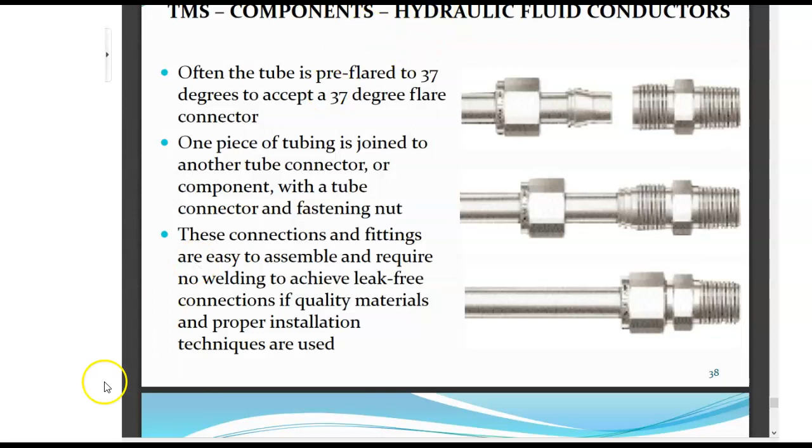Looks like probably a pipe thread on the other side, so we could get that for you. Here's some, you know, I just put in Swagelok. Well, you can put in Swagelok, JIC, pipe thread, NPT, national pipe thread, MPTT, national pipe thread tapered.

So here's like common fittings you'd have offshore. There's a T, there's an O-ring boss. See the O-ring on it? Unmistakable, obviously, right? JIC, okay, pipe thread on the other side, pipe up here.

So you'd have to know these. These would be in separate drawers, like when we done the work van earlier in week 2 or something like that. So each, you'd have Swagelok in one drawer, JIC in another, like a number 2 fitting, a number 4 fitting, number 6 fitting, whatever. Actually, I don't even know if there is a number 2 fitting anymore. Number 4 anyway, right, number 6, number 8, stuff like that.

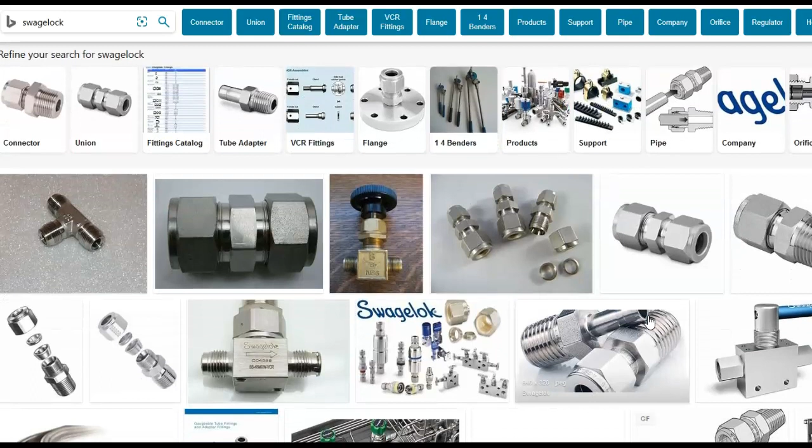So familiarize yourself with this, so when someone tells you to go in, even though it's labeled, you know exactly what to go for. There's a Swagelok there with a pipe thread on this side, swage here.

So like I say, you get some experience, you can get a job at worst case scenario. Times get tough at an electronic shop or a hydraulic shop, because everything is cyclic. The oil industry is cyclic if you're getting into that, if you're going to use ROVs for the oil, and some people won't be, but that was my background. It was like the aircraft industry - every 5 or 6 years, it's a boom or bust.

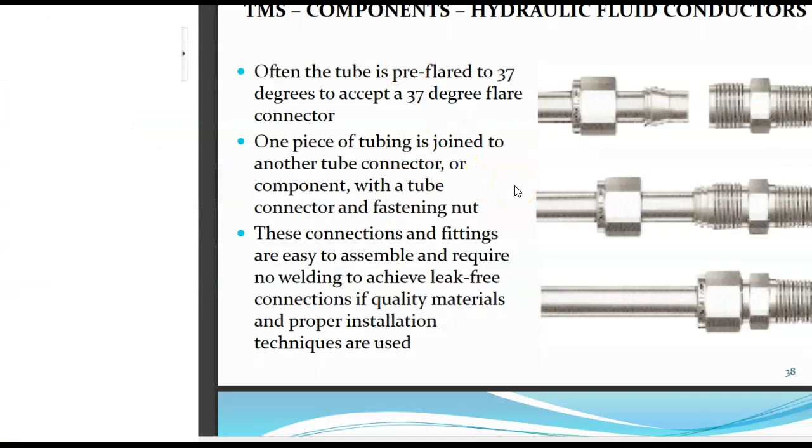Hydraulic hoses are used in applications where lines must flex or bend, such as a moving clamp actuator. Different types and amounts of reinforcement give those hoses specific pressure ratings. Hoses can last a long time, but all rubber slowly deteriorates with contact from various substances such as solvents, water, sunlight, heat, ozone, etc. Hoses are not as permanent as stainless steel conductors and should be replaced when damaged or past their estimated useful life cycle.

Most companies use a hose register to keep track of each and every hydraulic hose used throughout the surface and subsurface units, and replace them at specified intervals of time, usually every 3 to 5 years depending on company policy. So preventative maintenance - replace it before it bursts, because you don't want a spewing of oil into the environment or on a person, especially at high pressure. So remember that - preventative maintenance.